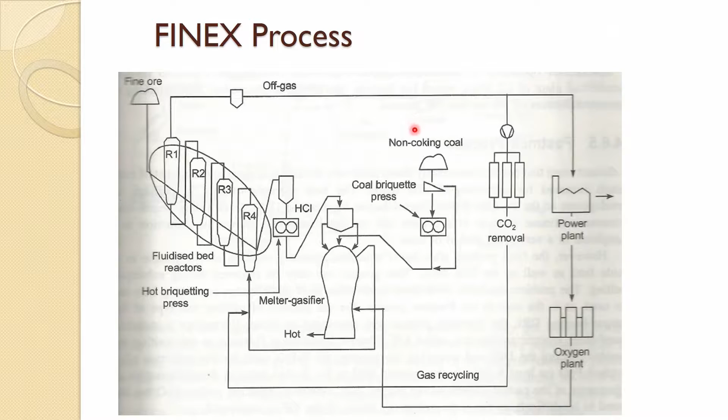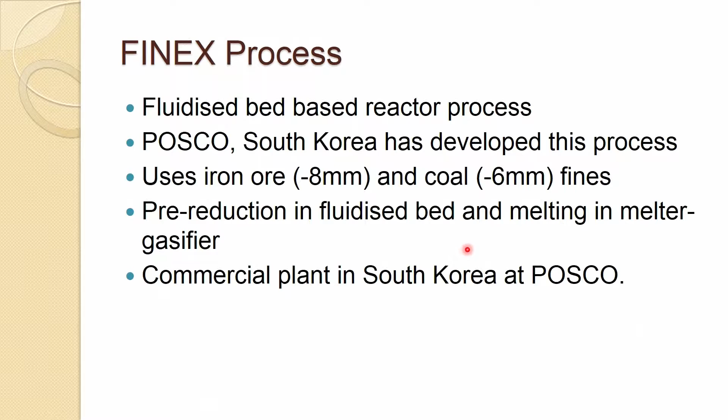Another one is the Hismelt process. Now, certainly the Corex process is a commercialized one and many plants are operating. The Finex process is on the verge of commercialization, one commercial plant is there at the moment, but others are also coming up soon. Beside these two, no other process has a commercial plant.

Now, Hismelt is a promising one. This was started by CRA Australia a long time ago, and then Germany and USA also joined later in its development. This is again based on fine iron ore and coal, with pre-reduction up to FeO in a fluidized bed, melting in a melter gasifier, converter type process, using fine iron ore and coal, and a pilot scale plant is there.

This Hismelt process has a pilot scale plant in Australia at Kwinana, but this technology has now been taken up by Tata Steel and others, who are putting forward a new version of the process called the Hisarna process, which uses a cyclone converter furnace and has a pilot plant at Tata Steel IJmuiden. Both processes have quite a lot of similarity, since this is an upgraded version using a cyclone converter furnace, which was used in one of the earlier smelting reduction processes, but it is not yet commercialized. So in the Hismelt process, you have this

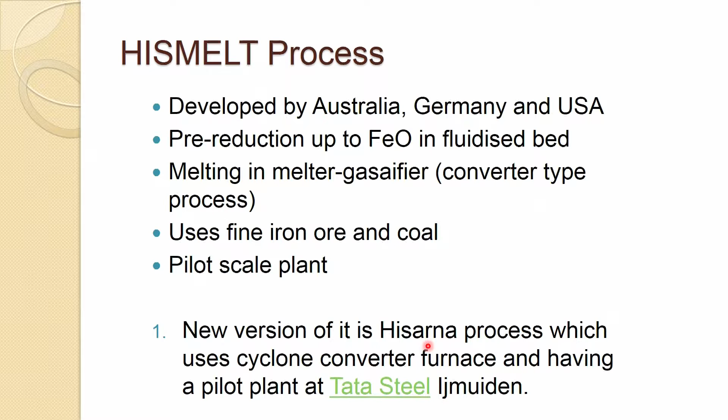So this is a sort of flow diagram of Hismelt, and a similar type of diagram applies for Hisarna, but it has a cyclone converter furnace. Still, they are at a development stage, not yet commercialized.

The processes related to these are smelting reduction and blast furnace related, and they produce hot metal. The processes at the bottom are related to DRI or HBI or sponge iron, which produce solid iron. So these two curves represent different things, hot metal and solid iron.

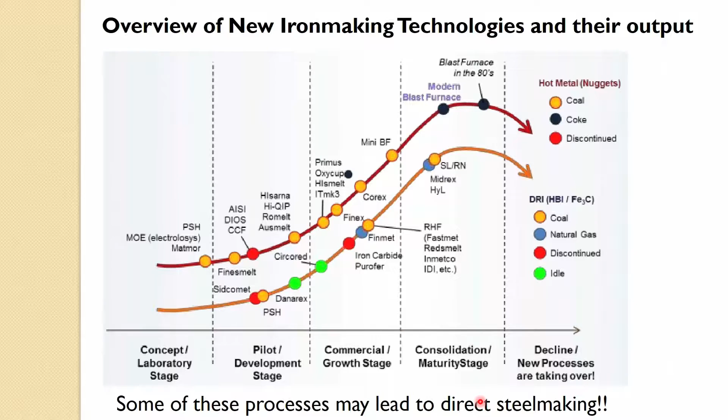So this summarizes most of these processes. These are already mature, commercialized, many of them, and some are on the verge of commercialization. Some of these processes may lead to direct steel making, hopefully.

So this is about the alternative route of iron making, and we will talk a little bit about the energy and environment related issues in integrated steel plants. I will touch upon this briefly since it's a small part of this course, and one should understand it given the growing global warming problem. We have a responsibility to understand the energy and environmental issues integrated steel plants are facing, and we should contribute to reducing it.

So we will start with energy consumption in steel production by various routes. There are quite a lot of arguments that blast furnace is quite energy intensive. If you look at this table: production step, process - blast furnace, basic oxygen furnace to make steel. Smelting reduction - you get hot metal, then basic oxygen furnace.

DRI, where you have solid iron, melting it in electric arc furnace - so by that route you make steel. Another route is you already have scrap and melt it in electric arc furnace to make steel. So these are the four routes.

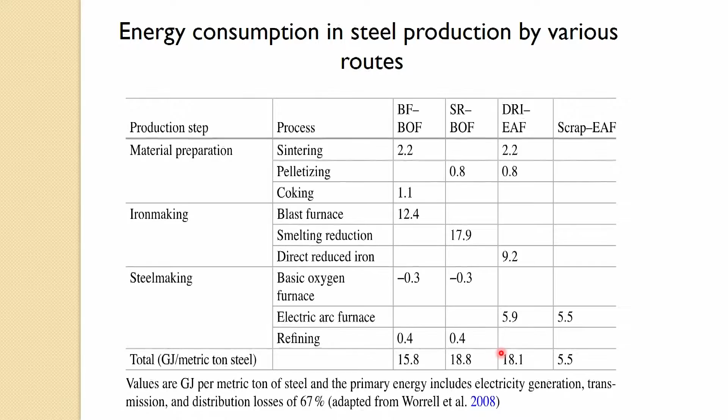So we still have not addressed the issue related to energy in this way, and that is one reason these alternative processes, though they have existed for a long time, are unable to compete with the blast furnace-BOF route. This gives you a summary of the various routes of steel making and how much energy is used in these processes.

Now we look ahead - it seems there is no real possibility that we could do without steel. This is very true; at the moment, no other material is available which can replace steel in the near future. Major iron and steel making processes - blast furnace, BOF, EAF, continuous casting, etc. - are quite mature now and have little room left for improvements.

New methods will be needed based on fundamental, technical, economical and ecologically sound principles. Ecological soundness is involved because so much energy is used, and most of the reduction comes through coal in one way or another, which produces greenhouse gases - that is where the global warming issue comes in. Average global temperature is predicted to rise by 3 degrees Celsius by mid-century, and it is predicted that by 2050 the blast furnace route will still dominate iron making, maybe about 60%.

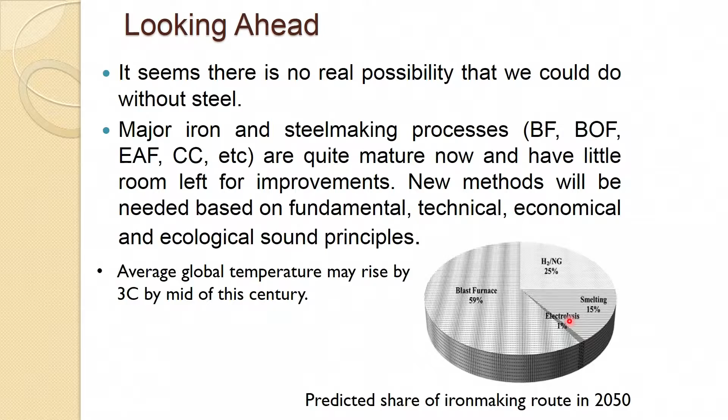DRI natural gas route reduction may increase, may go to 25%, smelting may go up to 15%, and new processes look promising - electrolysis may go to 1%. So efforts are being done to produce iron by electrolysis, but this would be possible only if electricity is generated not using coal, but in a clean way, like a renewable way.

So there is lots of talk about greenhouse gas emissions by the steel industries. I would like you to know what this means, so we talk more about it.

A greenhouse gas is a gas that absorbs and emits infrared energy. The primary greenhouse gases in the Earth's atmosphere are water vapor, carbon dioxide, methane, nitrous oxide and ozone. You already know the ozone layer is there around the Earth, and that is the one actually which is keeping us a bit warm, so it absorbs and emits sun.

These gases do not allow the infrared heat emitted by the Earth's surface to leave the atmosphere, thus creating a greenhouse effect and temperature rise. Without these gases, the average temperature of the Earth's surface would be much lower. So ozone is playing a very important role in that.

Now because if these other gases also come into picture, temperature certainly is going to rise, and that is where the greenhouse effect is coming into picture, and we produce lots of carbon dioxide in an integrated steel plant.

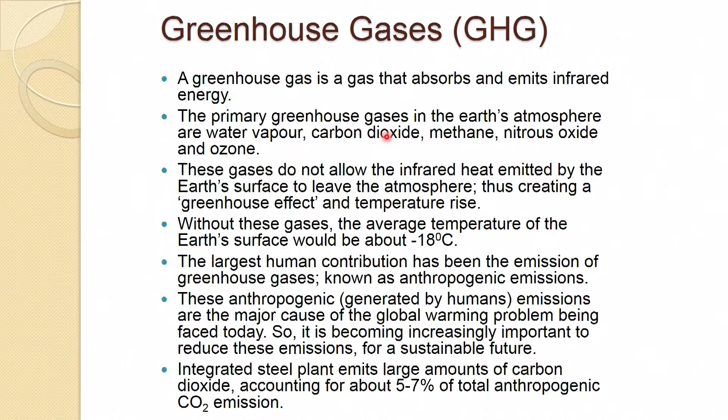So globally, by mid-century a drastic reduction has to be done in greenhouse gas emissions, and those who lag behind may perish. Very stringent rules have been made, and recently the Paris Accord is there on the environment.

So if the industry does not follow this, they have to shut down, and in fact many of them are shutting down due to violation of this greenhouse gas emission rule.

So in future the most important emissions in iron and steel industries would be CO2, dust, dioxin, NOx, nitrous oxide and mercury. In order to reduce CO2 and other emissions substantially in the iron and steel industry, there are three possible routes: carbon capture and storage,

use of alternate reductants like hydrogen or natural gas. Natural gas still has the problem of reforming and again getting CO2, whereas hydrogen is a possible route, or the electrolytic process which we just talked about in the previous slide - if electricity is generated in a clean way, this is the important aspect of it.

Besides that, there is another possibility like combining COG (coke oven gas) and BOF gas. You can make a syngas from them, and by using the Fischer-Tropsch reaction, you can convert it into useful liquid products like hydrocarbons, petrol, and so on. That way one can also capture the CO2 or carbon essentially.

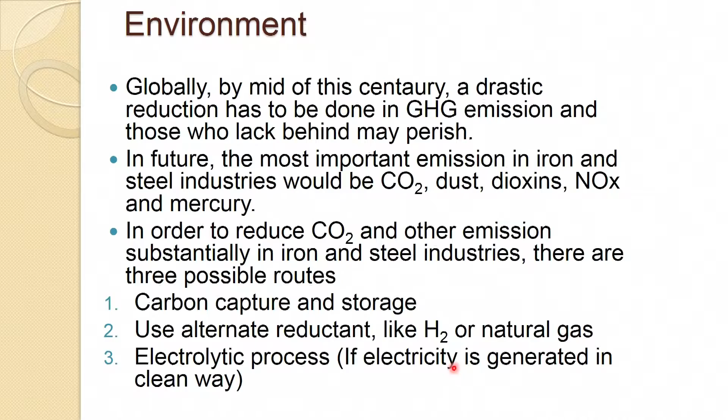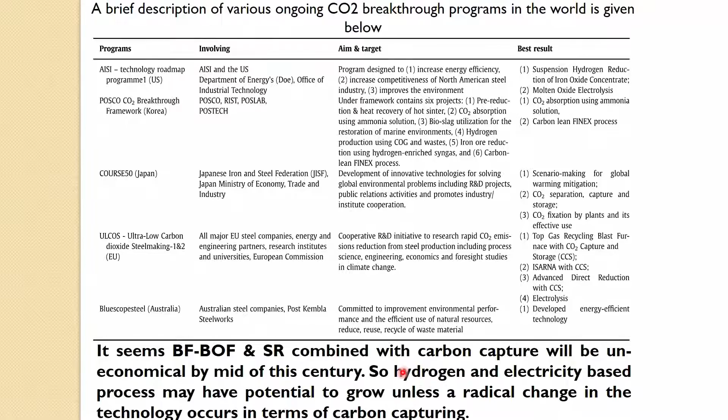There are many challenges the iron and steel industries are facing, and lots of research can be done experimentally and mathematically also in a modeling way. So, I hope you have enjoyed this course.